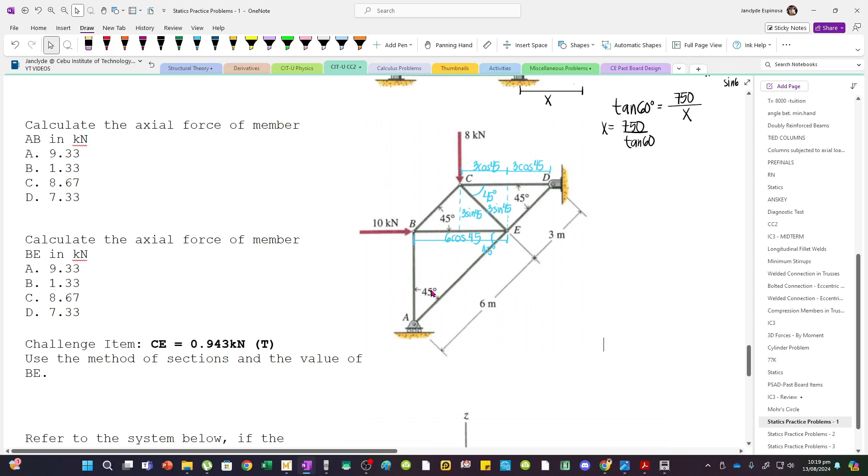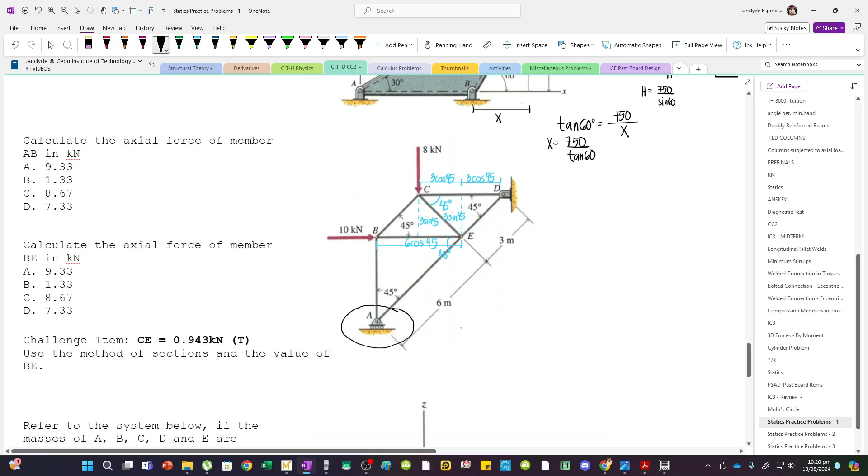So first, kukunin muna natin yung reactions. But pag truss kasi, hindi ko gusto yung hinge na reactions yung kukunin ko, kasi merong dx kasi meron ding dy. So gagawin natin, sa roller na lang tayo yung reaction niya. So we can sum up moments about the hinge support. So meron tayong...

AY multiplied by a distance of, diba, we can extend a line here, saka dito rin. So we have this triangle. Now, the hypotenuse of this triangle is 9 meters. And then this angle is also 45 degrees kasi perpendicular kasi yan, 90 dapat yung total. So this distance pala is 9 cosine 45.

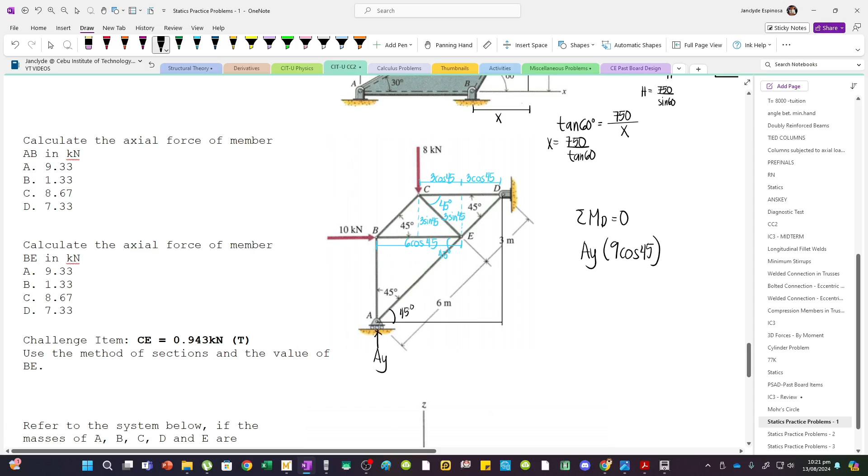And then, we have 10 kN. It will cause a counterclockwise rotation about D. So minus. Ito pala, clockwise. Kasi pag hahawakan mo yan, apply this force, it will rotate counterclockwise. Now, hawakan mo ulit, apply this force, it will rotate

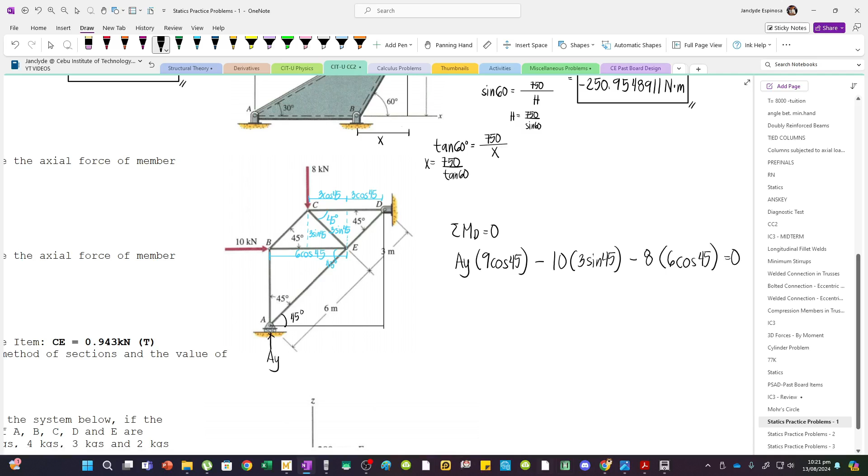counterclockwise. So minus 10 multiplied by 3 sine 45. And the next, we have 8 kN. It will cause counterclockwise rotation pa rin. So minus 8 multiplied by dalawang 3 cos 45, or let's just say 6 cos 45. So set natin to 0. We have x times 9 cos 45 minus 10 times 3 sin 45 minus 8 times 6 cos 45.

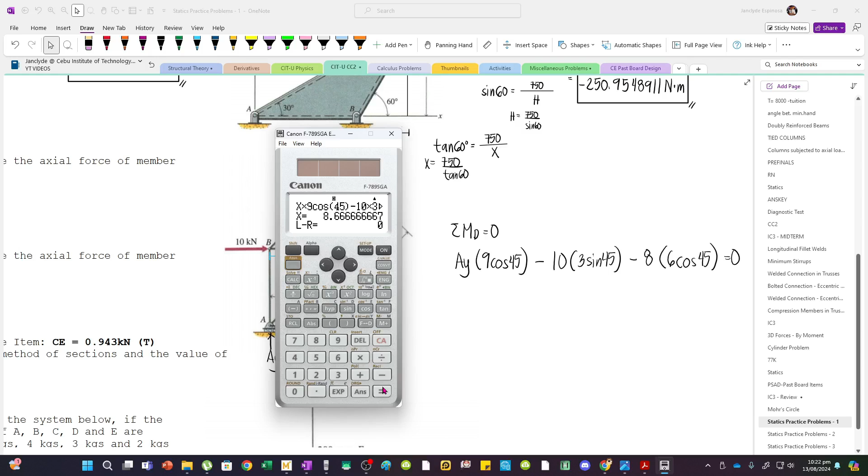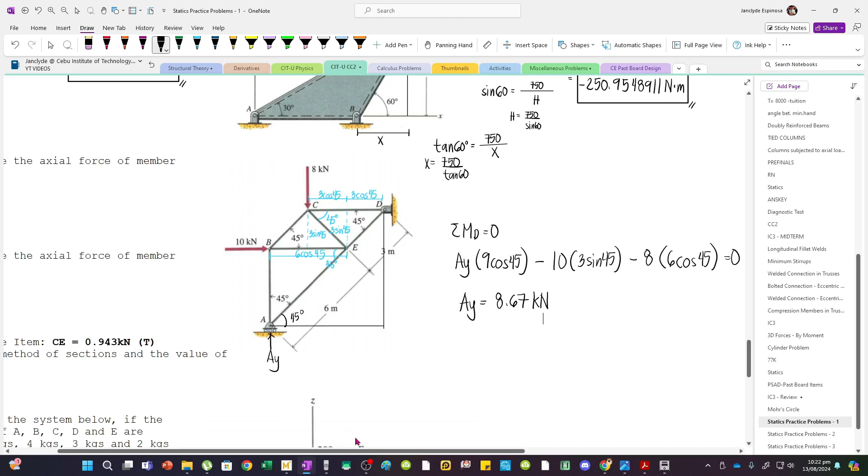Set to 0, ay becomes 8.67 na lang kN. Now, the first question is, ano daw yung force ng member AB?

So we can apply the method of joints. This is at joint A. So we have here AY, which is 8.67, and then this is AE. Ito naman yung AB. So we have here an inclination of 45 degrees.

But upon checking, pag mag-sum up ka ng forces along X, automatic na AE becomes 0. Kasi, di ba, AE cos 45 equals wala mang horizontal na force acting. So magiging 0 lang din si AE. So to solve AB pala, we can just sum up forces along Y.

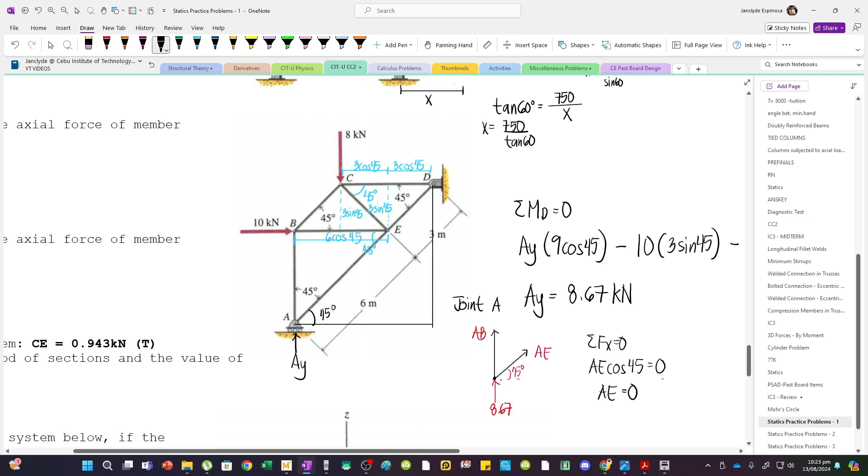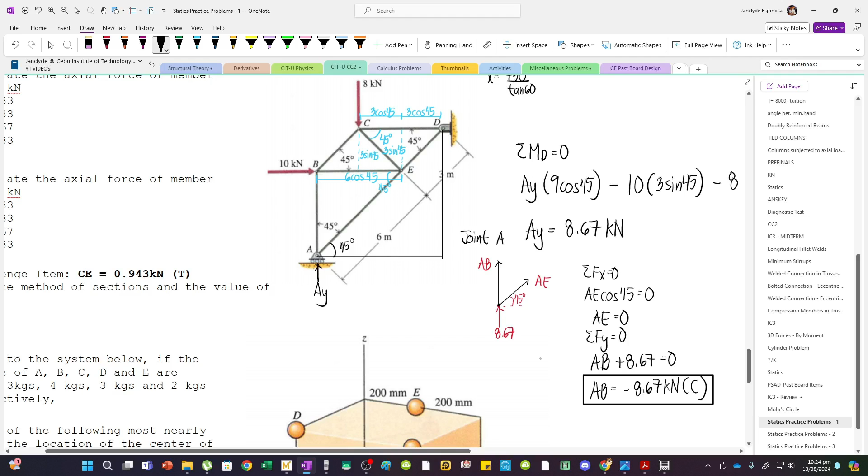Now, inassume ko siya as tension. So positive AB, since it's acting upward, plus 8.67, this must equal 0. So AB pala is negative 8.67, but this is compression. So ito na yung sagot natin for ano yan? The first question. So C, which is 8.67.

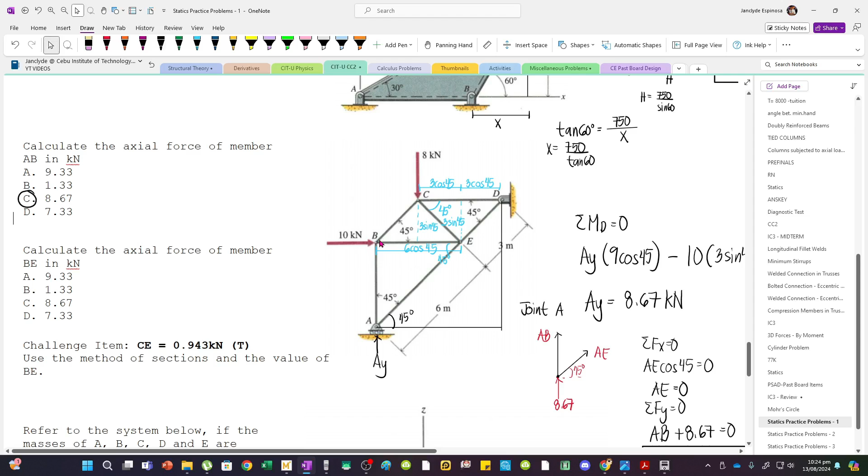Now, the next question naman is to calculate the axial force of member BE. And now, for member BE, we can consider joint B. So draw natin. Ito yung joint B.

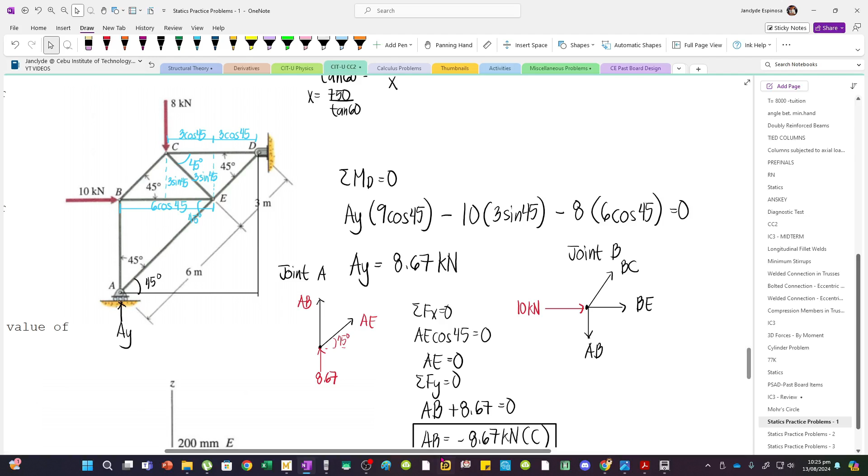And then we have here BC. Meron ding BE. And we have AB. Now, although alam natin na yung AB is in compression, don't change the arrows. Always draw in tension na lang para to avoid human errors na lang. And then aside from the internal forces, meron din tayong applied force sa joint. So sulat din natin 10 kN. Now, again, yung hinahanap natin is the axial force of member BE. So yung una nating masosolve is the force in member BC.

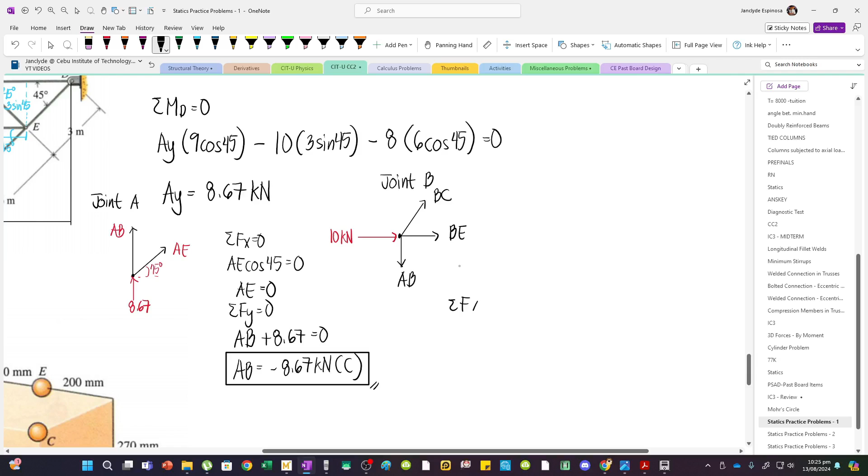So, summation of forces along Y. We have minus AB - again, just consider it as tension, but take into account the negative sign once you solve. And then plus BC, this is still 45 degrees, sine 45 equals 0.

So it becomes minus negative 8.67 for AB, so we make that minus too. Plus BC sine 45 equals 0. You can shift solve, or input minus 8.67. Move it to the other side, divided by sine 45, so we have negative 12.26. This is in kN, and since negative came out, this is in compression.

But that's not what we're looking for. What we're looking for is BE. So we can sum up forces along X.

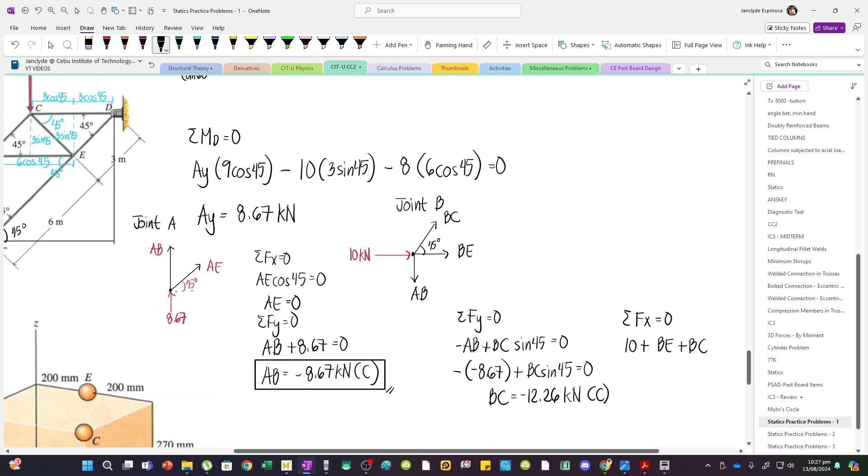We have 10 kN going to the right, so positive. And then BE going to the right, still positive. And the component of BC along the x-axis is also going to the right, so plus BC cosine 45. Set that to 0.

But we already know BC, so it becomes 10 plus BE minus 12.26 cos 45 equals 0. So BE will become 12.26 cos 45 minus 10, giving us negative 1.33.

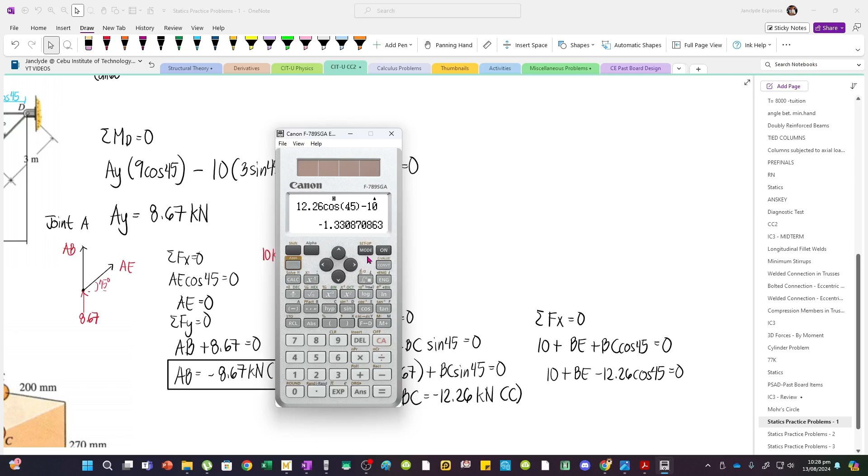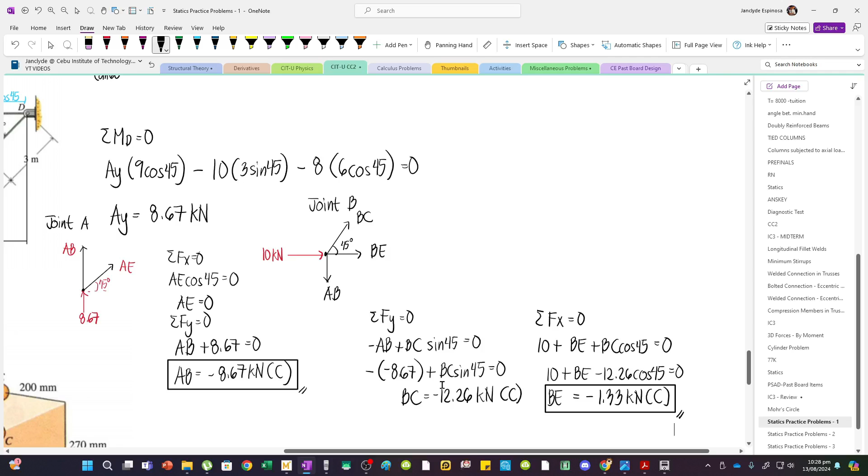Since it's negative again, this is still in compression. So this is our answer for the second question - turns out it's letter B.

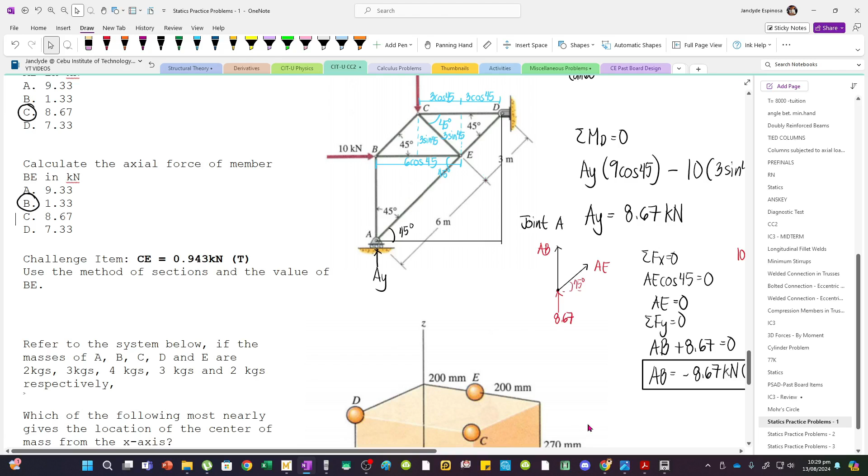Now for the last question, our challenge item: what is the force in member CE? You can apply the method of sections using the force you got for member BE. So here's what we'll do - we make a cut like this.

Now the next question that will arise is, where do we take moments? The internal forces will come out - this is BE, and this is CE. CE, BE, this is AB, and this is CD.

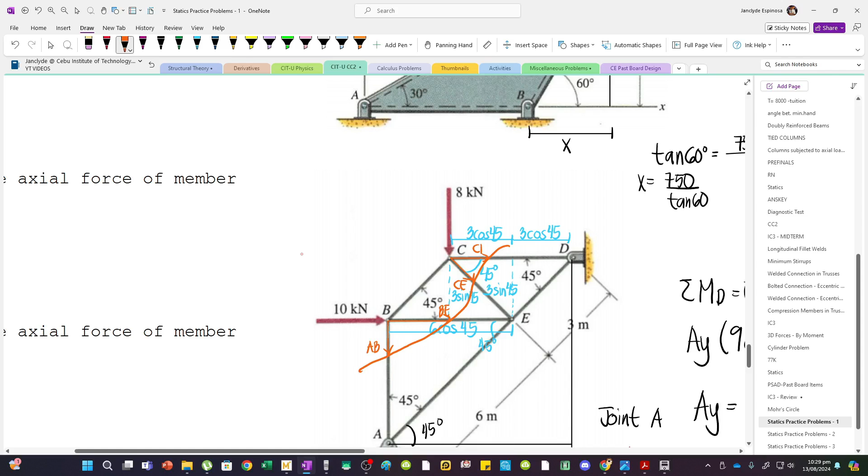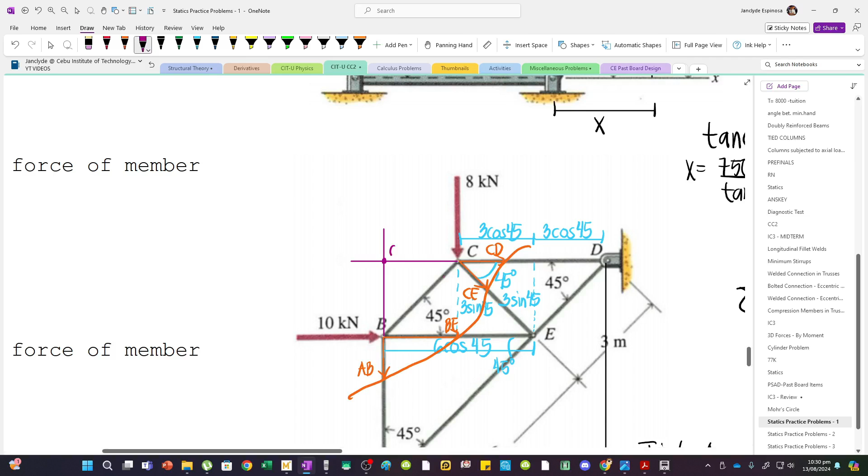You might wonder, we don't have CD yet, so how can we apply this? We can extend the line of action of CD and AB since they will meet at a common point. So let's extend these - they have a point of intersection here. Let's label this as point O. If I take moments about this point, I can exclude AB and CD.

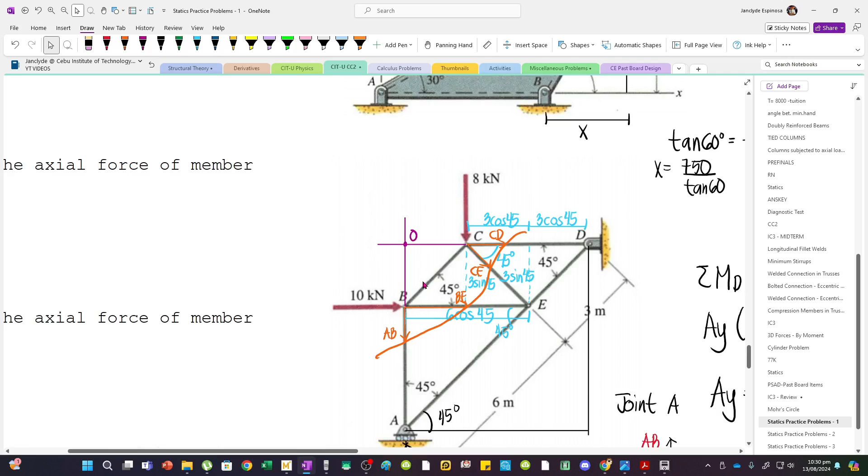So we have here two options - you can consider the section to the right or the section to the left. I'll go with the section to the left here, because going left means I don't have to include the forces of the hinge support, or this one either - just the left side of the section.

Considering the left side, let's take moments about point O again. We have negative 10, this force, multiplied by 3 sine 45, and then minus BE, this force, still multiplied by 3 sine 45. And the 8 kN force will cause a clockwise rotation about O.

So we use plus. Plus 8, multiplied by - if this is 3 cos 45, this is also 3 cos 45, because 45-90 is the triangle type we have.

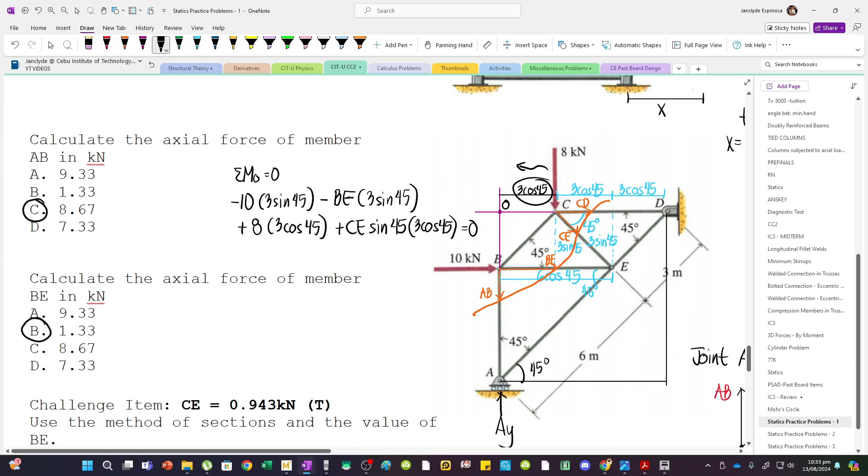And by the way, we know BE - BE is negative 1.33. So we input minus 10 times 3 sine 45, minus negative 1.33 times 3 sine 45, plus 8 times 3 cos 45, plus CE sine 45 times 3 cos 45. Set that to 0.

So CE equals 0.947. There's a slight discrepancy because 1.33 is a non-terminating decimal, so if you substitute 1.333 instead, it becomes 0.9428, or approximately 0.943.